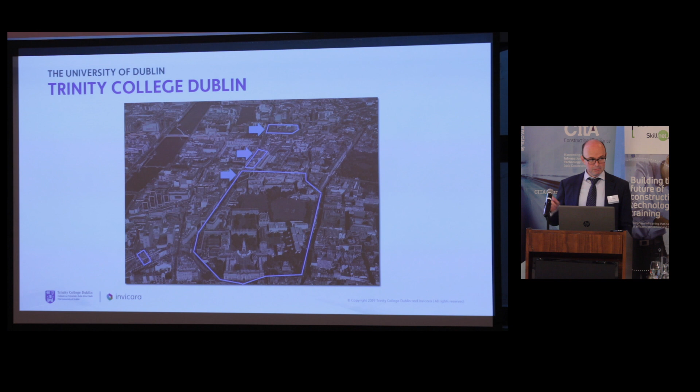Trinity has, like I said, 52 acres in the middle of the city, but we've got a fairly decent vintage in the city as well, with a couple of 100-year-old buildings, a few 200-year-old buildings, and a few 300-year-old buildings.

This might also challenge the principle that BIM is better suited for modern buildings. In fact, some of the work we're doing on historic buildings making digital twins is working out quite well. The reason is we can pick the stuff the users and clients want, and we're not fussing around finding out how many tons of steel are in the basement and trying to employ people to strip that back later at great expense.

About 2 million visitors come across the threshold of the campus every year, and about 1 million visit the Book of Kells, plus a whole lot of people in between. So it's the size of a decent-sized town, I suppose.

But we've got a good capital building programme as well, about 1.4 billion on the go at the moment. One of the papers in the pack showed 285 million—I think that might have been an earlier stab at the strategic plan total. It's about 470 million for the first few projects you see there.

And the big one here, Trinity at Grand Canal Dock, will be one of our smart cities attempts, building a 5.5-acre campus down at TTec.

That was for Mercury, who I know used it quite effectively, and for Acon, who designed it. But the day-to-day work involved 13 ring main units, 12 transformers, 3.5 kilometres of cable, and a lot of digging—thankfully with no outages, because we were doing this dental work while the college was still operating.

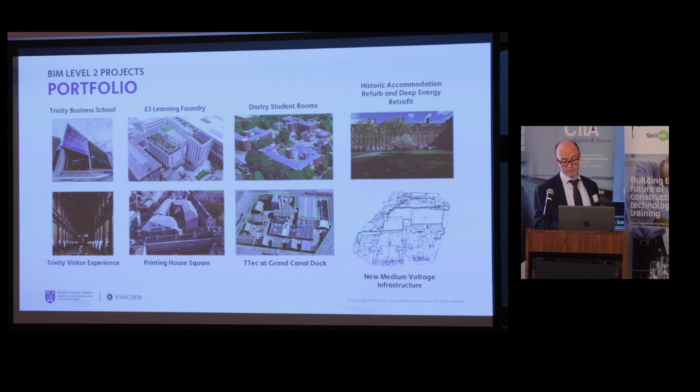So we've got quite a bit on at the moment, and BIM is interesting to me. Now, I'm also not a Luddite—I would be regarded as the office nerd, actually.

When it comes to this type of stuff, I'm very happy with the idea that we transformed our offices in Trinity, when I worked here before, and also in NUI Galway, from using a pencil and getting the first roll in a DPX plotter. You remember the ones that used to grab the pen, do a dot, put the pen back, grab another one and do those lines? People used to come and watch them in the office.

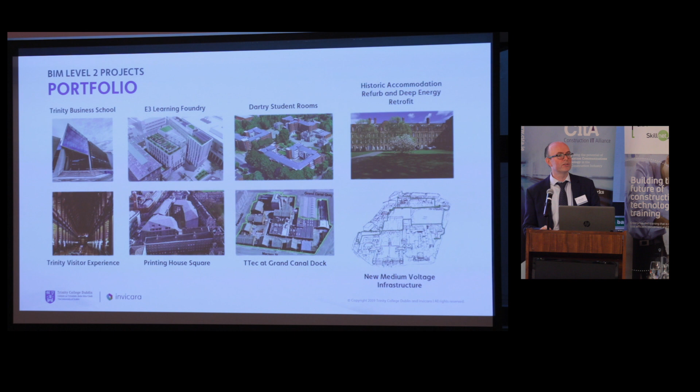So I'm quite happy with the idea of bringing new systems in, and I'm not getting old and cynical, I just have questions about the value of how BIM is working at the moment. So the business school, to talk through a couple of perspectives.

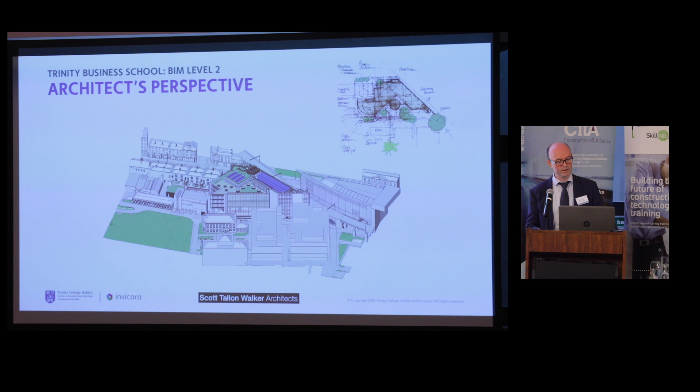The architect, Scott Tallon Walker, did a fine job of taking the Foster-esque napkin sketch that was probably drawn on an airplane by David Cahill somewhere, and turning it into a fine building. But also we had some good quality survey and Matterport scans done of the area to start establishing the baseline for it.

This obviously rapidly evolved into the BIM model. Later on I have a small diagram which I drew, although the colour coding got a bit screwed up, about where BIM is successful for me. Certainly in the planning and construction phases, I think there's a good bit of success in some areas, but there's some horrific failures, unfortunately, and it's costing a fortune, and I'm wondering where the value is going sometimes.

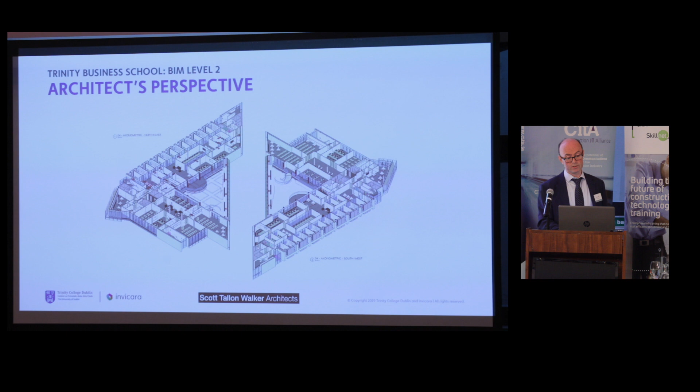Obviously, there's an awful lot, a huge amount of detail and pretty pictures that we can put up here, and if you're tired of pretty pictures, you're going to get even worse. However, where is the value going to come?

And I'm going to put up the first challenge of near zero energy buildings. The business school was an NZEB building. So this is a 60% dip on the energy performance, both thermal, electric and other carbon impact of buildings built in 2008 is now an NZEB standard. And we have to reach this by law. I'm much more interested in BIM making some contributions in this field than I would be in other areas.

Because I think there's been some efficiencies already brought to bear with database and object linking and embedding of databases over the past.

Great. But when you have to switch off the clash detection because it can't understand the physics that I understand on site, it gets flaky. The examples we would have is a 2-inch pipe that's an inch away from a wall. Every man, woman and child knows you can stuff a piece of insulation in behind it, but BIM can't figure that out because it believes you can't squish stuff.

It breaks the laws of physics, 500 clashes appear from floor to ceiling. We start switching clash detection off. These type of things start to get very difficult on site when somebody forgets to switch it back on again.

So these are practical outputs that are affecting us at a higher level, especially when it comes time for claims management. I appreciate the commercial package on the business school is now shut and that Rhatigans are in the audience. So I'm going to also say that the final account is agreed. Celine, don't forget that, please.

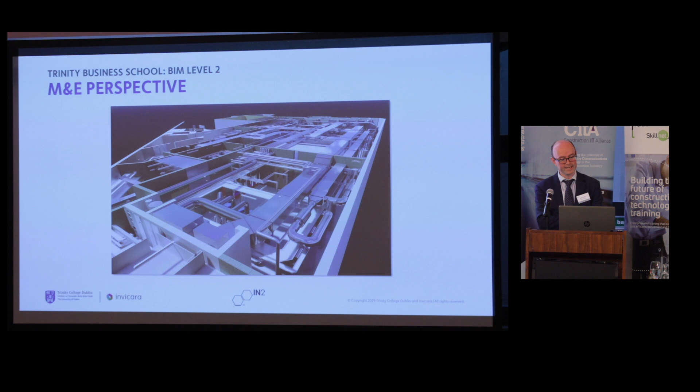But we have had an awful lot of money spent on this project, I think because of BIM, and not saved because of it, unfortunately. I'll come to that again. The cynicism is right the way through my presentation. More M&E stuff and complicated stuff from BIM as well.

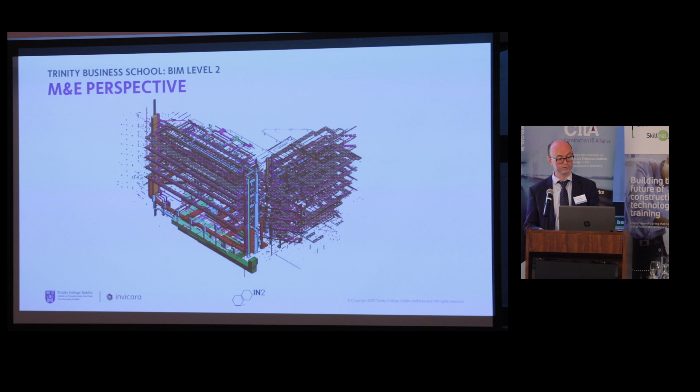All very helpful. Contractor's perspective. Now, I think the contractors have this nailed, right? It's excellent for them in terms of organizational, site management, BIM, whatever level you want to take it to.

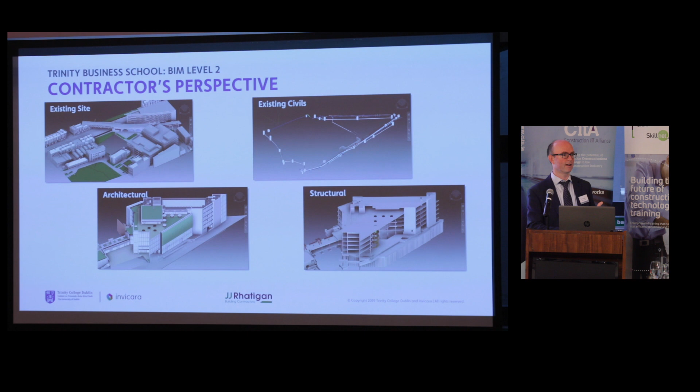How even it manages loads and unloads from the road, busy road as it was on Pearse Street. I think the contractors have this licked, and it doesn't concern me, but I am always very aware when a contractor really jumps on a piece of technology, how it will benefit the client at the end of the day.

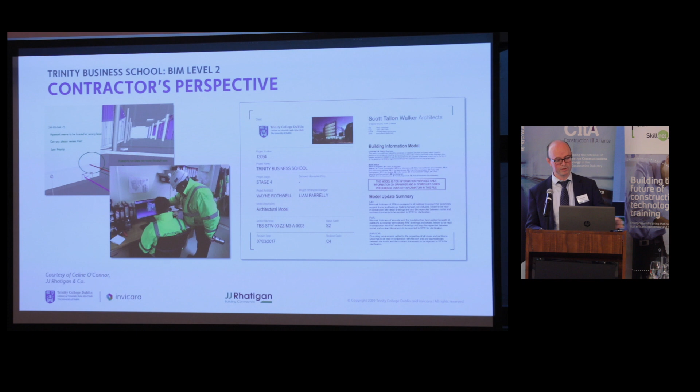However, an area that was interesting for us was progress and site work, and I know Rhatigans were very good at this. Whenever I asked for a progress pack, instead of getting a book of A3 general arrangement drawings or a pair of 3D goggles, I didn't mind which, I got back loads of blank pieces of paper where the COBie data drop hadn't occurred on time. This gets very difficult when you're trying to run an €80 million job.

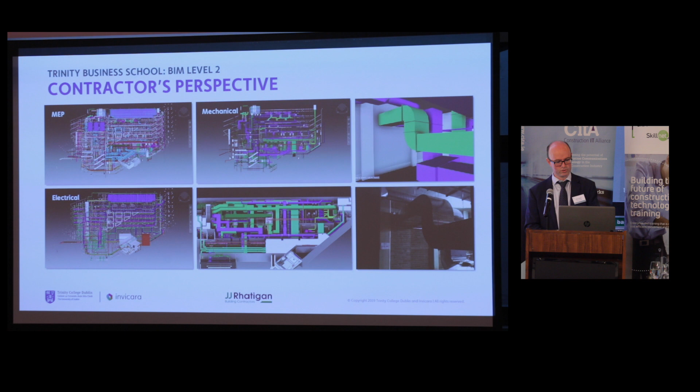The contractor's perspective in coordination worked very well, and compliments to Mick and Niall Stone in Designer Group and to Burks, who also used this with great effect. The computer-assisted virtual environment that Designer Group have in their office is something to behold. It's extraordinary, and it was genuinely very useful.

When I asked the question and put the challenge out to the group, who owns the parts of BIM? Whenever we ran aground, we found that somebody hadn't dropped something into the model, or the contractor was recording stuff on paper drawings in his hut, and it wasn't being passed down to the right people, and the model wasn't being used as the native entry point in BIM analysis. It was still going on paper first, then to another bit of paper, and then five people would gather these bits of paper in a meeting and say, let's BIM it now.

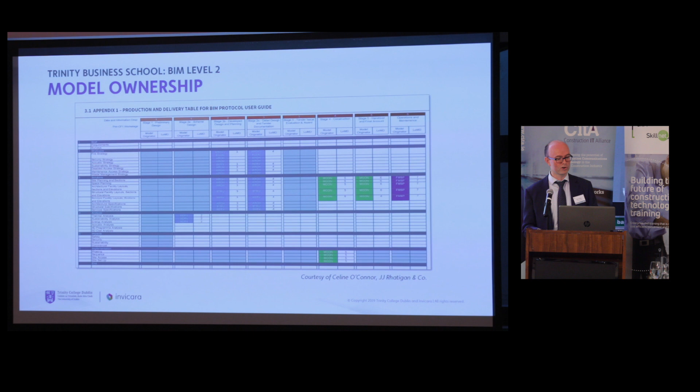It was the wrong end, but that's perfectly natural. This is happening in the rain, by the way. It's perfectly natural that this is the order of things, but who owns the sections of those BIM model components, and who owns it overall?

So aware that I've only got a few minutes left, I wanted to start talking about the pros and cons. I think I'm probably going to hear today that clients don't know what they want, and there's a load of clients in the audience. I would put it to this room that we know exactly what we want, and we also know exactly what we want out of BIM.

So where does the money go? We probably spent around €2.5 million on the BIM model - that was an estimate Turner Townsend did for us on the business school. And I am still struggling to tell our provost that we got €2 to €2.5 million worth of value out of that in the project. I'd like somebody to show it to me.

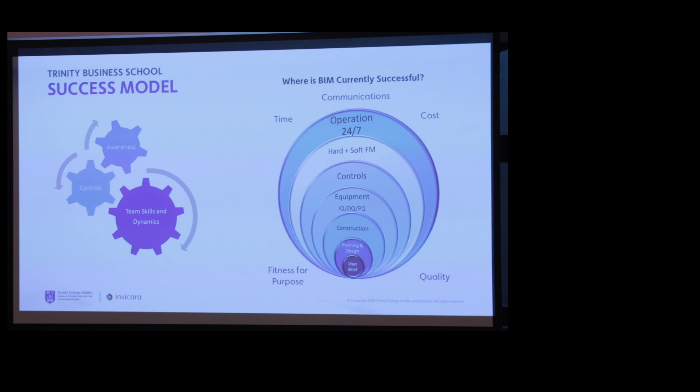But on the right hand side, the user brief and the operations section are red for me - this is a green, amber, red diagram in the original one I had. So I believe the user brief is the most important part. I think BIM is not succeeding, from my office's perspective, in helping users articulate what they want from assets.

I think planning, design and construction are green in the model I had. I believe there's certainly plenty of capacity for BIM to do an awful lot more heavy lifting there. In terms of installation, operation and performance qualification of equipment, controls, and hard and soft facilities management, that's amber for me at the moment.

I think equipment coordination is getting better, but we're still seeing errors. Only yesterday I was talking to Dan about it - a project which shall remain nameless.

There were 250 repetitive, expensive components in this building. They had to be sized. We saw the control sample and made observations on it. Those observations were marked up onto a set of master drawings, but they didn't get translated into BIM. They were all made in Russia to the previous design, and they all arrived on site wrong. They're all being sent back. So BIM failed us there in this particular installation.

On the 24/7 operation of a project - it's the biggest circle and it is red for me. Five percent of the project value goes into the built environment at the start: construction fees, demolition, design team fees to the wine and cheese section, that's about 5%. The cradle to grave, the other 95%, is where the real money goes. And I'm finding it really difficult to take this 0.5 terabyte of data and convert it into something useful.

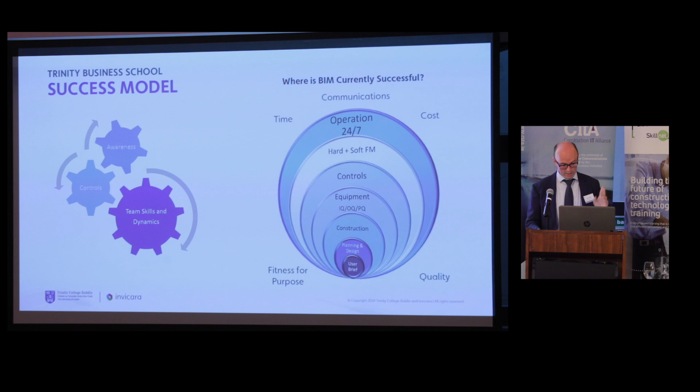As the plumbing supervisor in our office, who's also not a Luddite, looked at this fancy laptop, and Celine came in and presented, saying this is what Rhatigan's will be giving you in the end. We said, that's wonderful - can I laminate it and stick it to the boiler house wall? Because at the moment, it's not as useful as you think it might be.

So I think the operation phase is where people are being let down by BIM at the moment, and I'd like to challenge this room to do something about it, if you don't mind. I think that's where the real value of the 2.5 million can come out - at the business school. So no pressure, and then to convert that.

Can BIM help? I think the next phase of ExCEED, the next phase of our energy management, we're all beholden to do something about the environment. We don't have to lecture people on the environment anymore. I'm being lectured by teenagers on the environment, and I'm embarrassed about it, and we need to do something about it.

My daughter is the best lecturer on environmental matters. I'd bring her into the ExCEED project in a heartbeat, because she can tell me exactly what she wants out of the world when I'm finished wrecking it.

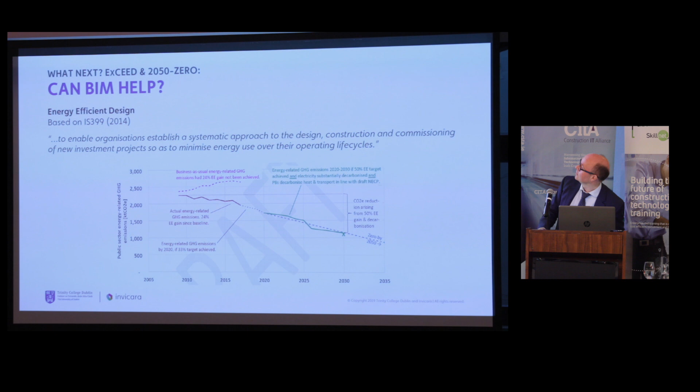So these graphs are thankfully beginning to go the right direction. The first dotted purple graph - very difficult to read the slide, I apologize, maybe that's intentional from my perspective - but that's where it would have gone if we hadn't brought ExCEED in. Greenhouse gases are shifting down, thankfully, in the built environment. We have a dotted section now by 2020 to get through if we hit our targets of 33%. Then the green will continue to 2030 and then to zero greenhouse gases by 2050.

Now, if BIM is really going to make an impact from my professional perspective, it makes it here. The operations of the buildings, the coordination of the built environment at the end of the building process - that's where the real value can be hit. Environmentally, societally, financially.

So yes, focus on where the pipes and wires go during the building process. But you know what? To be honest, if you said to me tomorrow BIM's broken, it's not available for the next building, we'd move on. It'll be fine. We've done it before. We know one brick on top of another. That's what I tell them.

But when it's out the tail end, we need a database - whether we write it down, record it in Excel, have a CAFM system, an integrated workplace management system, or a digital twin. That's where the asset value begins to pile up.